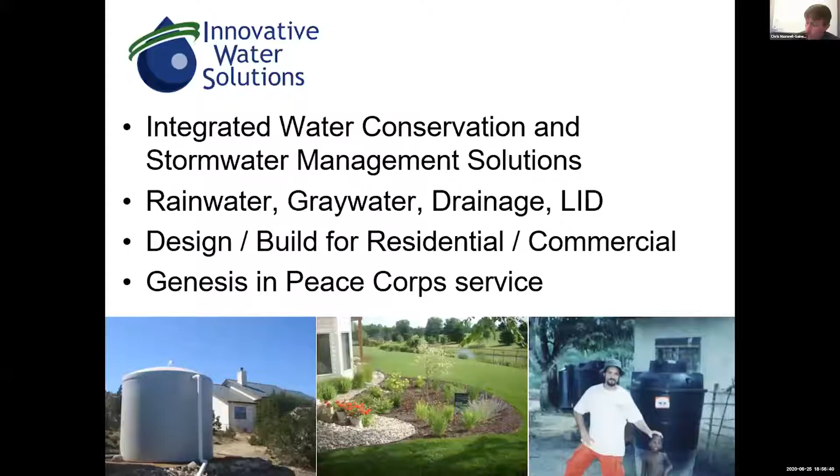So that's kind of the genesis of the company and where we are nowadays. I just realized I hadn't updated this slide in a while, so let me show some of the statistics.

We're over 8 million gallons of rainwater storage volume installed since 2004. We're over 1,000 customers, and we're almost at 600 rainwater systems. These systems vary from 500-gallon tanks all the way up to our largest, a 330,000 gallon system. So there's a wide range there, and a lot of experience and things we've seen over the years.

Before I get going, because I've been doing this for so long and seen so many DIYers and so many different types of systems out there, I came to put together this psychology of rainwater harvesting.

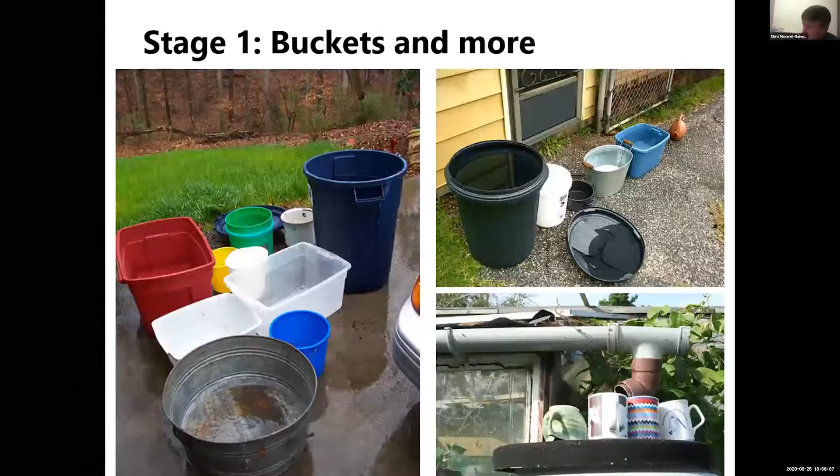I think it's just a journey a lot of us go through, and I'd like to share it with everyone. Stage one, you start off with buckets and pails, even coffee cups. That's what you start off with—you just want to collect it, dip it out, use it for your plants, and that's good. That's where a lot of people start.

Then maybe they take it up a step and actually purchase a rain barrel, commercially available or manufactured, or even just augment a trash can to be a rain barrel. It looks a little better than a bucket, but yeah, they take it to the next step.

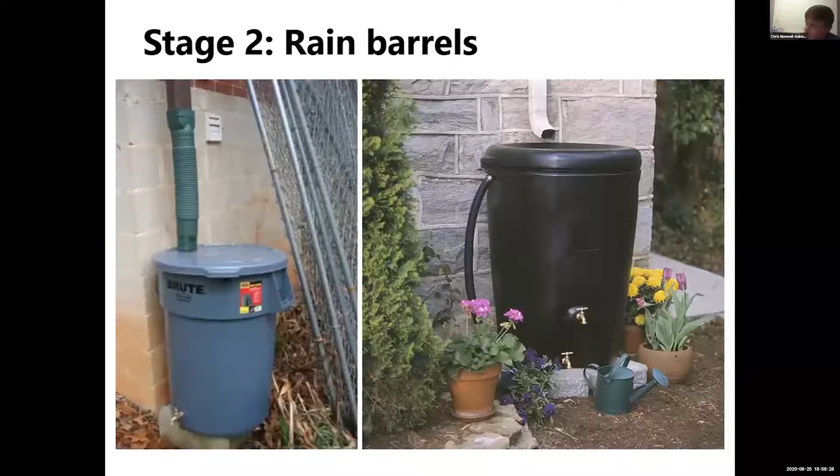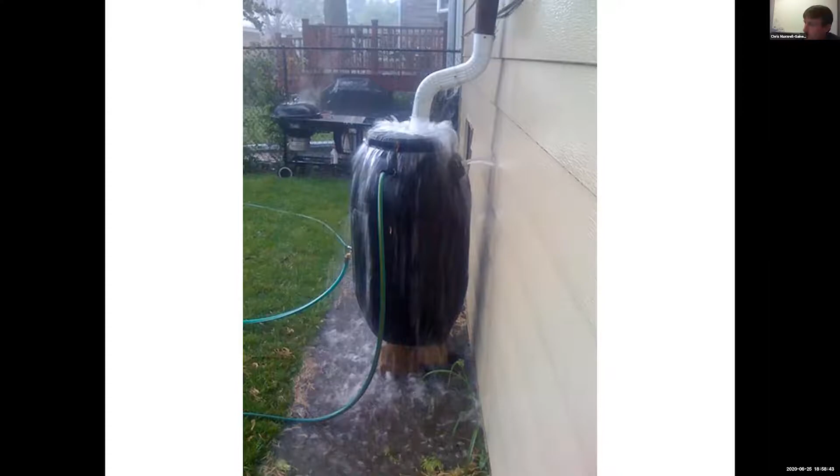But then this is what typically happens with rain barrels—they fill up very fast. They do provide a good amount of water, but not enough for maybe your needs. So people step up to the next step and think, well, if it's overflowing, let me just add some more barrels to it.

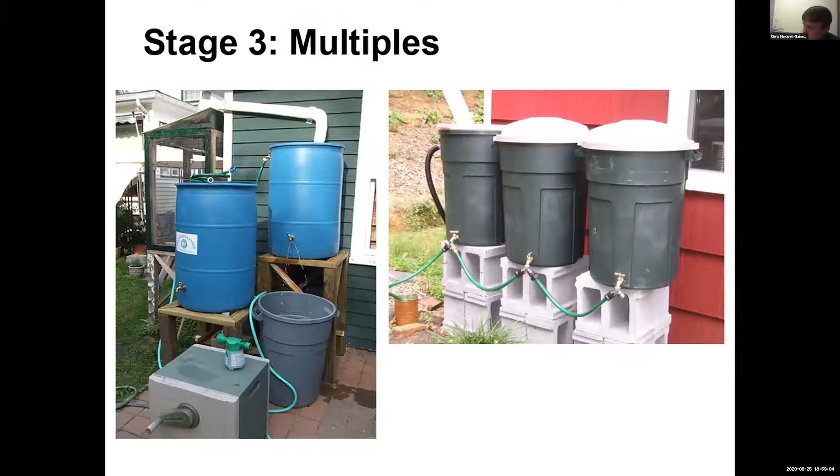You can even see someone solving a leaky hose bib issue by putting another barrel underneath it. They think, hey, let's start putting these barrels together, even creative setups like this. But when you count up the number of barrels and multiply by their volume, in the end it's overall not a lot of volume spread across a large footprint.

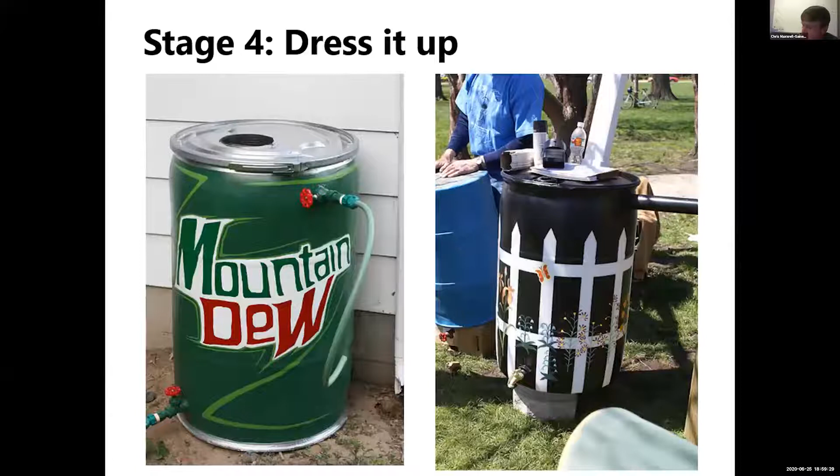So then you think, well, let's make it look good. Rather than just plain old barrels, let's add some paint, some designs. Let's put them in a cabinet. Let's paint a Texas flag on it. Just do something to spruce it up a little bit, and that's good.

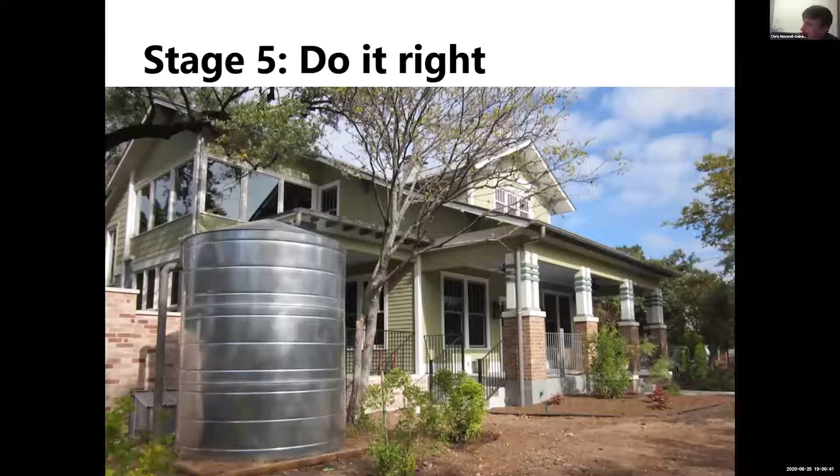It looks good, but to really be effective—I don't want to say rain barrels aren't doing it right—but if you seriously want to take rainwater harvesting to the next level, it's going to take exploring larger volumes and harvesting them into a singular unit, so it becomes easier to use with, say, a pump system.

There's no more news stories out there on the local news about the level of the lakes and all that. But then next thing you know, as always, drought starts to come along. Our rivers and lakes start declining, and then we realize, hey, there's something going on, even though we should have been cognizant of that the whole time. Then we have a growing concern, and hopefully it doesn't get to panic, but it often does, such as in the 2011 drought here in Central Texas. Then something like the Memorial Day 2015 rain comes along, 20 inches, and fills up Lake Travis and the Highland Lakes immediately in one day, and the cycle just starts over.

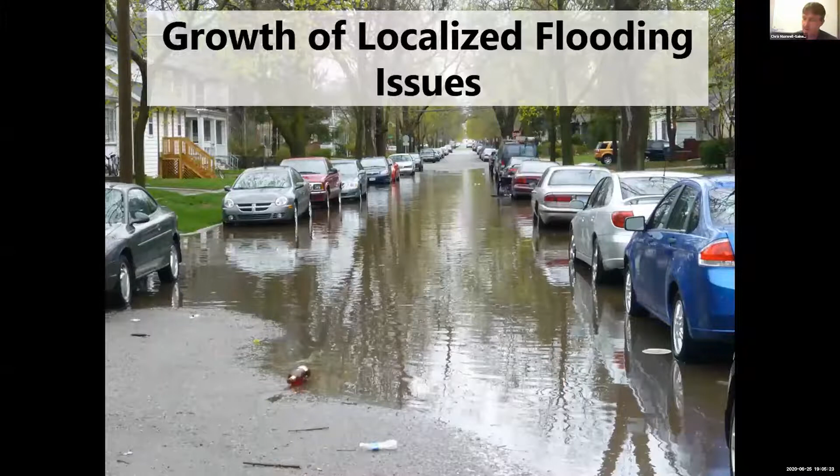I could not even know it's raining outside, and we can just track it by the number of phone calls we get to our business based on the size of the storm event. Because when these large storms roll through the area, it exposes a lot of problems for people, and naturally our calls go off the charts. We're seeing this more and more, and part of this is because of the amount of impervious cover that's being added to our urban areas.

And then you get things like scour, with so much water flowing off the impervious cover into our waterways that weren't meant to convey that amount of water, or that speed, or that intensity. So you're getting stream bank erosion happening, and a lot of cities, like the city of Austin, are having to spend capital funds to implement projects to shore up these different stream banks.

And then obviously there's an increase of stormwater pollution, which is just bad overall for our watersheds, for the fish and animals that depend on the water flowing into these creeks. So there's ways to mitigate this. Again, rainwater harvesting is not going to be the end-all savior of all this, but these are just some really key reasons that we need to start putting our eye towards managing stormwater, possibly through collecting it.

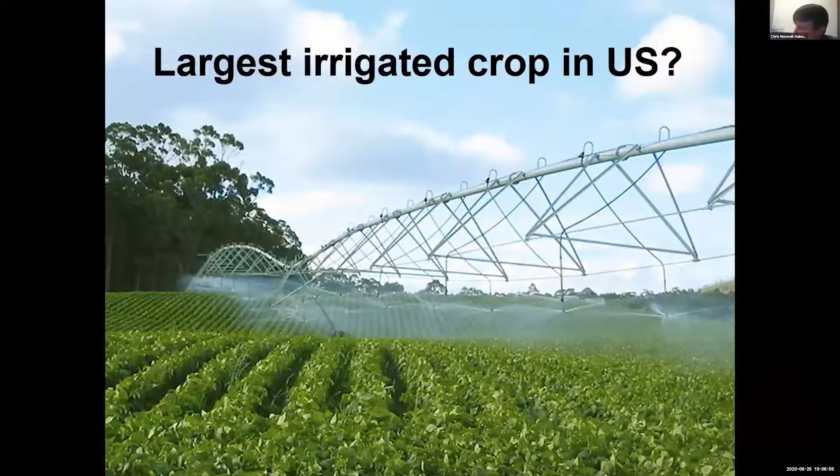Moving on to the next big reason for rainwater harvesting. I won't do a poll, but does anyone know what the largest irrigated crop in the US is? Maybe some of you have heard this before. I wouldn't be showing a picture of crops if it were crops. Actually in America, it's turf grass that's the largest irrigated area. Hey Jessica, yeah you got it, lawns. So there you go.

So when we start thinking about it, why are we using municipally treated potable water to spray on our lawns when we have a perfectly great opportunity to use rainwater?

An example from the City of Austin: this graph shows two years. The green is 2007, kind of spiky near the bottom, and the pink is 2011, a dry year. You can see the differential in City of Austin water use. The scale on the left is million gallons per day, and there's a vast difference between the wet and dry year. The wet year averaged about 150 million gallons a day in summer, versus 210 million gallons a day in the dry year. I grant you that wasn't everyone taking more showers during a dry year.

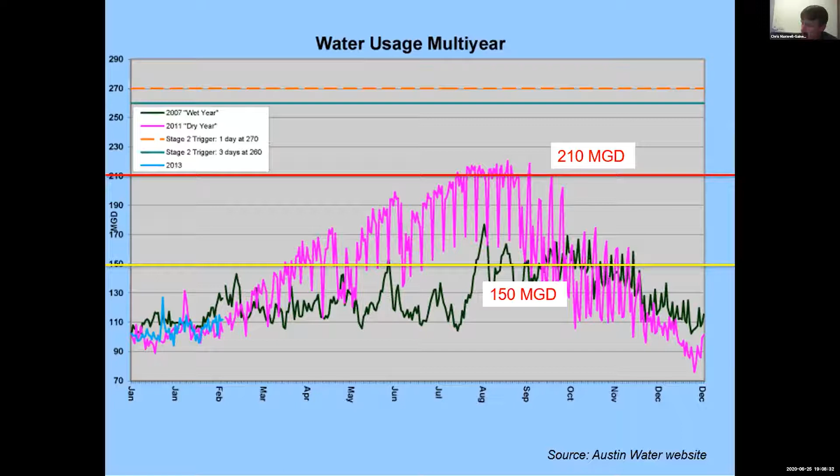So basically 60 million gallons a day during the summertime between these two years for the City of Austin was used just to put out on our plants and landscaping. Something to consider when you put it in that scale - 60 million gallons of water used for irrigation a day is pretty baffling, just the enormity of it.

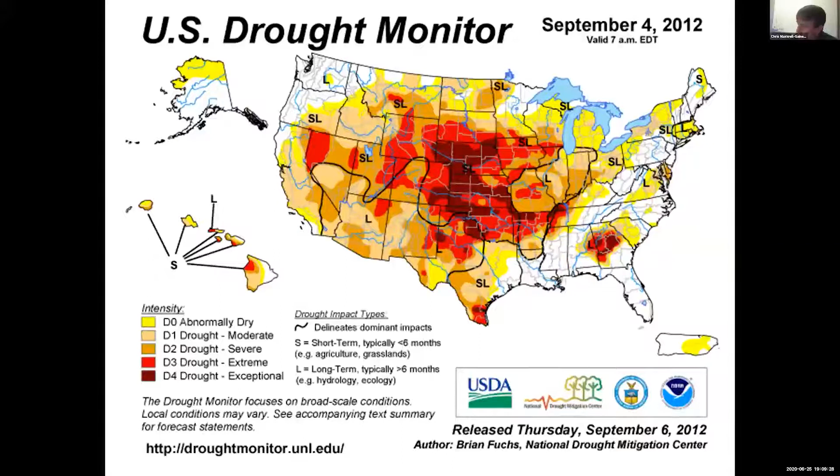From here we kind of bumped along for the next year - these are all roughly a year apart, so you can see the time change. The drought moved up into the Midwest, still lingering around 2014, and then we're slowly getting better, definitely in the Texas US. But to return back to the level of 2010 took about six years to get through that. So I use this as a way to say we have to be prepared for what's coming in the future.

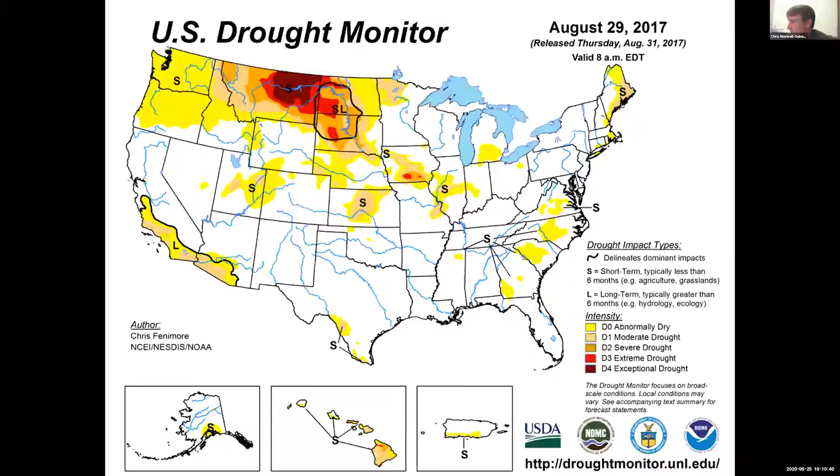There's going to be a lot of climate change issues, so having the ability to harvest rainwater matters - because even during that dry year of 2011, it still rained about 15 inches here in Central Texas annually that year. So we still got rain, it wasn't like nothing at all. There were still opportunities to collect rainwater even during the driest of drought years. Being able to buffer your risk and get you to the next point is a great opportunity for rainwater harvesting.

Another big thing with water is embodied energy - sometimes you hear it called the water-energy nexus or energy-water nexus. It basically means it takes energy to produce water for consumption, and conversely, it takes water to produce energy. Think of cooling - thermoelectric plants need water for cooling, using it for steam generation, all that stuff.

So there's a lot of embodied energy in the water that we have to use as a society. I put this graphic together to show where this embodied energy comes into play.

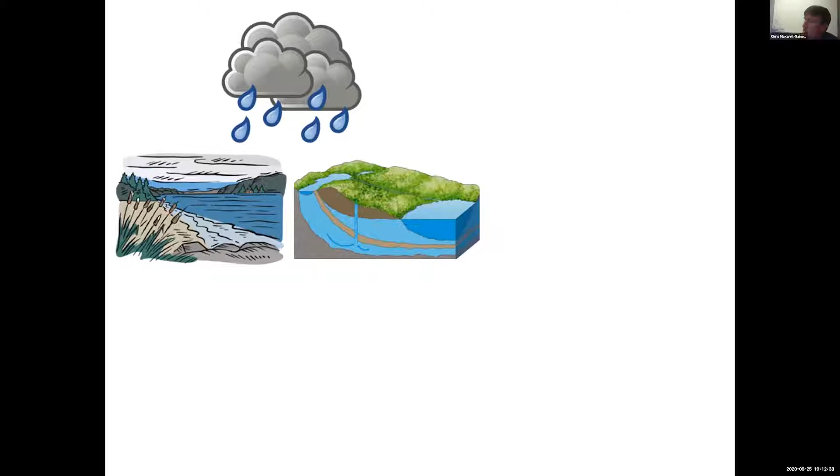Then we come in and we're pulling the water out of our lakes, pumping it out of our aquifers so we can treat it. Then we treat it and put it into our system so we can push it out into the distribution system. Our cities have miles and miles of water pipes that all that water is going through in order to get to our homes.

Once it's there in our homes, what do we use it for? Of course we use it for indoor use, but we're also using it for irrigation and outdoor use. So basically we're starting with the rain coming down, harvesting that water, and then putting a lot of energy into cleaning it and pumping it miles and miles around our cities.

On the flip side, our wastewater is essentially the same thing. We're doing the same process: collecting it, pumping it miles and miles, treating it, and then putting it back into the environment.

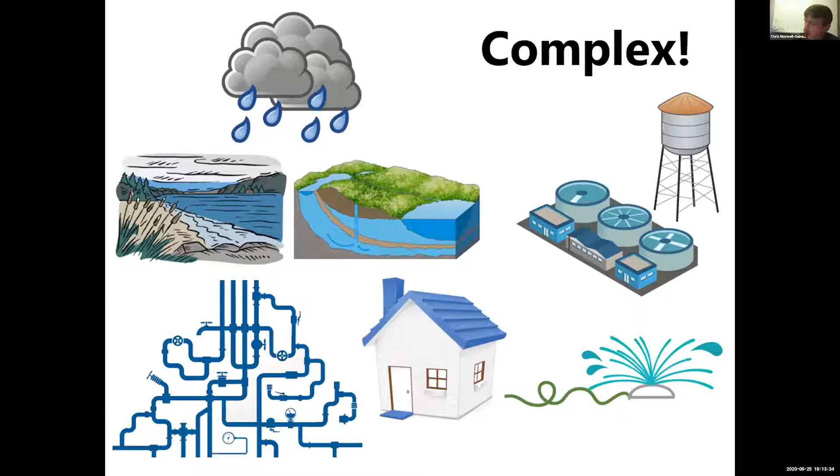So obviously, hopefully where I'm leading with this is rainwater harvesting. It's a much simpler idea, and it can strip out a lot of that embodied energy. We start with the rain, and if we know the end result is irrigation use, rainwater collection cuts out a lot of steps, and therefore a lot of the carbon footprint associated with most of the water resources we use in our society.

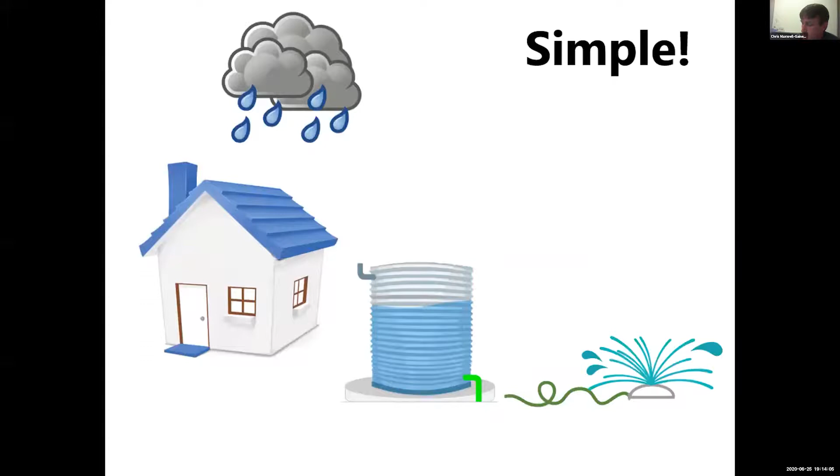So I hope that setup enticed y'all to understand why rainwater harvesting is really important. Richard just pointed out that some cities do have toilet to tap, but there's really only a couple. I believe Wichita Falls in Texas is one of the closest, where they're taking treated wastewater, putting it into the reservoir, and then pulling the water out to be treated for potable use.

I think El Paso has a direct injection well, so they're taking treated wastewater, injecting it into the aquifer, and then miles away pulling that water out. So there are some cities trying to buffer the risk of droughts, because the 2011-2012 time period really taught a lot of our cities that they need to be thinking about the future.

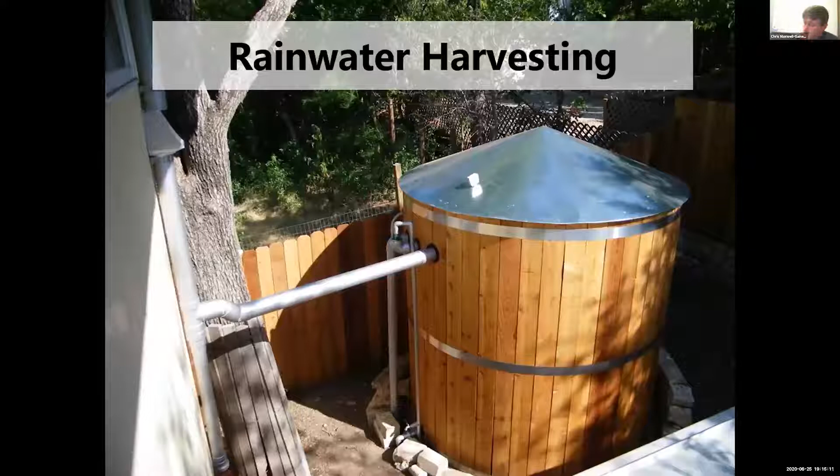Is it worthwhile to collect rainwater in El Paso when it only rains 14 inches on average there a year, and most of that comes in maybe 2 or 3 rain events with the monsoon? Or is it beneficial to collect it in Houston when they get 50 inches a year and they're just worried about getting the water away? It's really awesome to see the different climates here in Texas and trying to apply rainwater harvesting to those different climates.

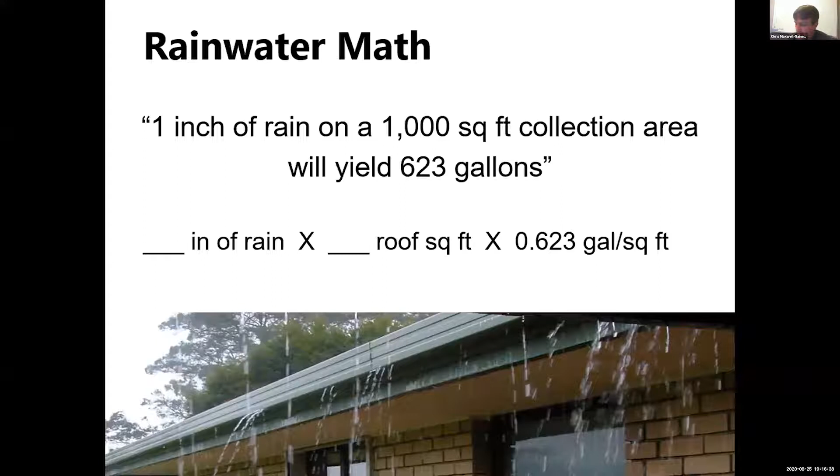So just very basic math: rainwater harvesting, 1 inch of rain over 1,000 square feet gives you 623 gallons. It's a lot of water, and at the same time it's not a lot of water. But it's just a free resource that can easily be tapped when anyone has a structure, a roof, to collect it from. Again, a lot of y'all understand the benefits of rainwater harvesting, and as I've mentioned before, the opportunity to reduce stormwater runoff.

A lot of times when we come into a situation where people are having drainage issues, a big culprit is the runoff from the roof surface. So when we decided to add drainage into our mix of services, we were really trying to figure out the nexus of: if someone needs a drainage solution, can we pitch the idea of a rainwater harvesting system? They can solve their drainage issue by collecting the water off the roof rather than letting it pool around the house. Can we collect it into a tank, and then direct the overflow to a better spot so it doesn't cause flooding issues?

Over the years we've done a lot of projects like that, where someone started off just thinking about fixing drainage, and then that morphed into, hey, let's actually collect the water and allow that customer to use it for lawn and landscaping purposes.

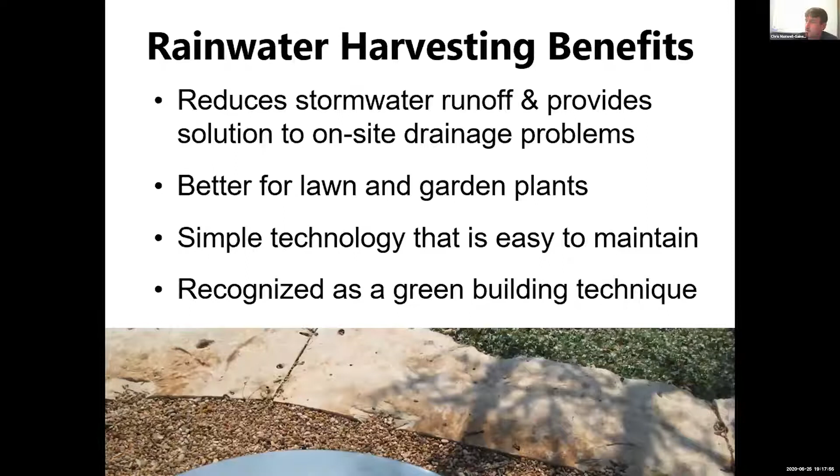So the three main uses: the first one is outdoor water use. Very simple, not much needed—a simple rain barrel is good to go with that. You can expand on it, and with typical outdoor use, keeping big organic matter out of the storage container is beneficial. But if something gets in there, it basically becomes like a compost tea, which is also beneficial to your plants. So it's not bad if some organic matter gets into your rainwater tank if you're using it just for outdoor use.

The next step is indoor non-potable. Since it's a state law now, all cities allow you to bring rainwater back indoors, even if you have a municipal water tap on your site. Prior to 2015, you could not use rainwater indoors, but a law was passed that allows that. Rather than taking it all the way to potable use, you can bring it in for indoor non-potable, such as toilet flushing and clothes washing. We've only done a few of those projects because it fits well for a new build rather than a retrofit, so opportunities may be a little few and far between.

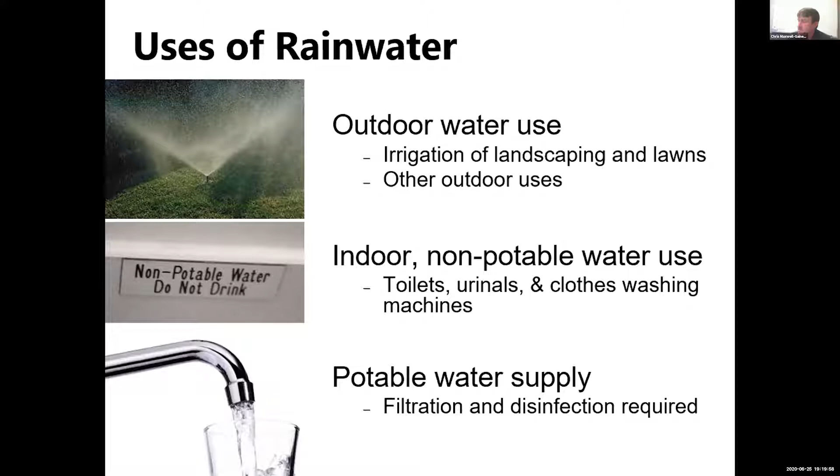One of the biggest questions I get all the time is, how big of a tank should I install? That's hard to answer without more information. But to figure out the best size of your collection system, you want to take into account your collection surface size. If you're only collecting from one downspout pulling 200 square feet, there's no reason to put a 3,000 gallon tank on that, right? So you want to consider that.

You want to consider the storage volume size, because these things can really start to have a big footprint and eat up a lot of real estate. So look at the area where you're going to locate your tank, and whether you can put as large a tank as you want in that space. Last is your expected demand—are you going to feed it into an irrigation system like spray irrigation and use a lot of water? Are you just going to use a single hose bib, or water pails to water your plants? What's your demand out of that? Those three things come together.

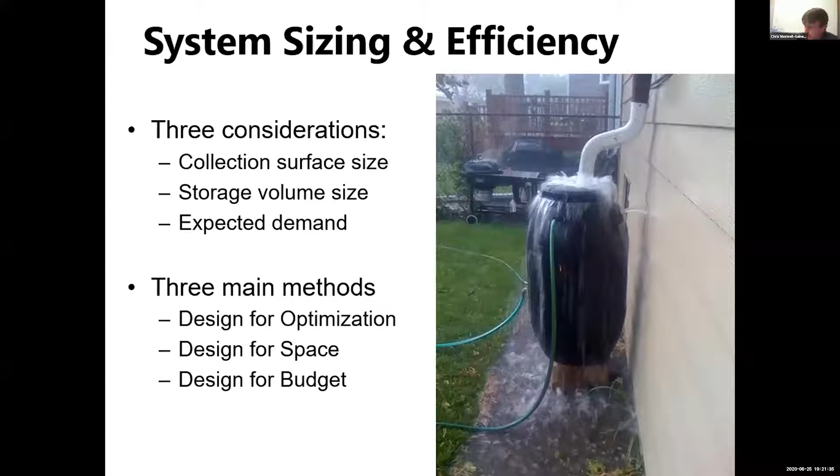From that, I've created three different methods: design for optimization, design for space, and design for budget. Design for optimization works well if you have good numbers about how much water you need. Typically on a commercial project, a landscape architect designing the landscape will put out a demand calendar or schedule to know how much water the landscaping may need over the year, taking into account the ET rate, monthly ET rate, and all that stuff.

So in lieu of having the exact demand for your plants, just going about and having a general idea, and even using your own water bills or something like that, you can use that data to at least give you a good starting point.

And then in places where we have that feast and famine of rain events, very long, heavy rain events, and then droughts, it's really important to try to put as much investment in your storage volume as you possibly can.

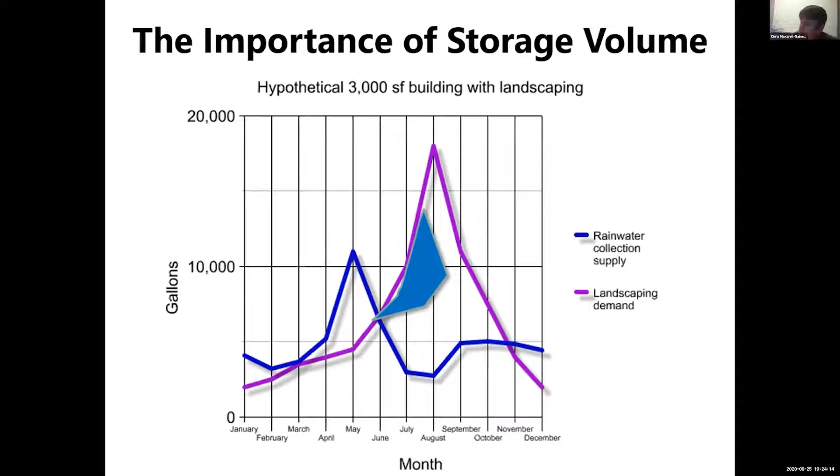So you can see you're collecting a lot of water during that springtime over what you really need. And so what we're trying to do with storage volume is capture that water, and figure out a way to move that volume over into the time when you need it. We want to try to size the storage volume as large as we can without going overboard, keeping in mind the optimization idea.

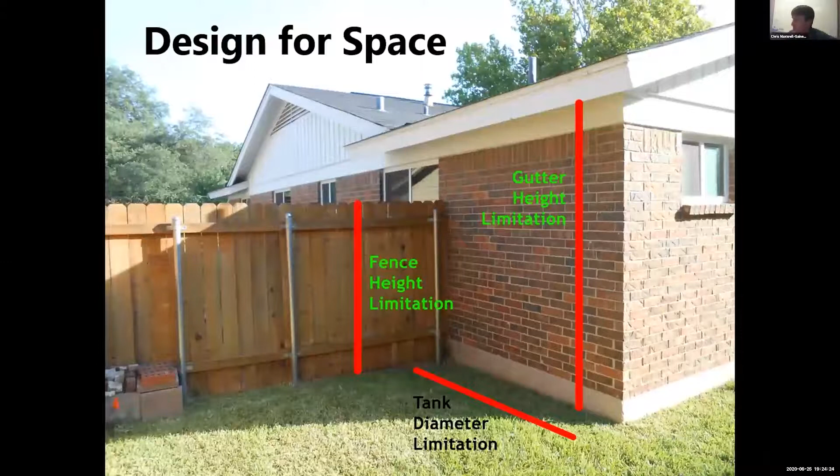Or like in this example, what if you wanted the tank to sit here and you did not want to see it from around the corner? Well, then you have a tank diameter limitation, and so we're going to size the tank accordingly. And then obviously we always have a gutter height limitation, because you can't have a tank taller than your gutter, unless you want to pump the rainwater into the tank. In lieu of doing that, as long as the gutter is taller, then the rainwater tank water will flow by gravity into that tank.

So using these limitations, we can design a rainwater system for that space.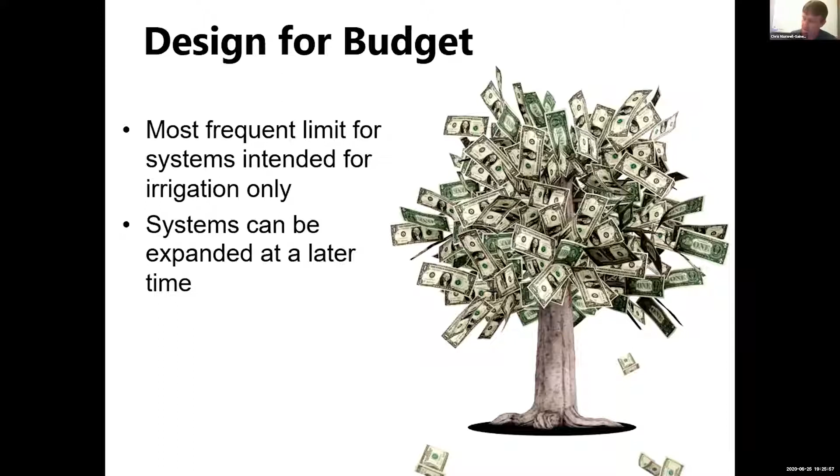Now, last but not least, is design for budget. We have a lot of people who come to us very excited about wanting to implement a rainwater system, and they think it's going to be so awesome, and they just want to do so much with it. We're very happy to help them along, but we also have to realize that most people have budgets. So we really try to optimize the system design and system operation to maximize the budget as much as possible. Something always to keep in mind when you're looking at these systems.

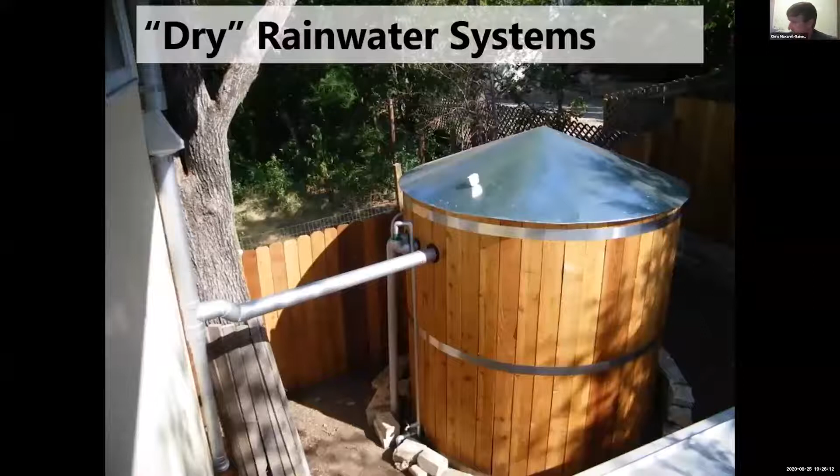So there's two types of rainwater systems. The first one we'll talk about is a dry rainwater system. You can see the example there. Essentially what's happening with a dry system is the water comes into the collection pipe, and then the collection pipe goes into the top of the tank. Imagine a rain barrel, so downspout into a rain barrel. Well, after a rain event, this pipe will dry out, and so hence the dry rainwater system.

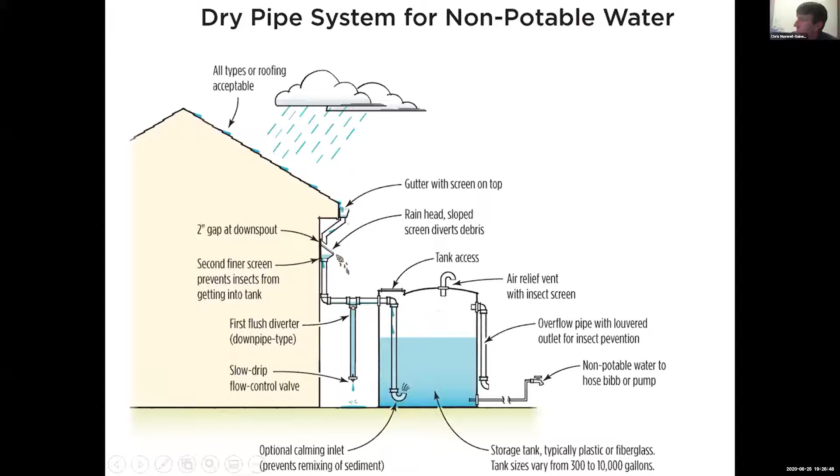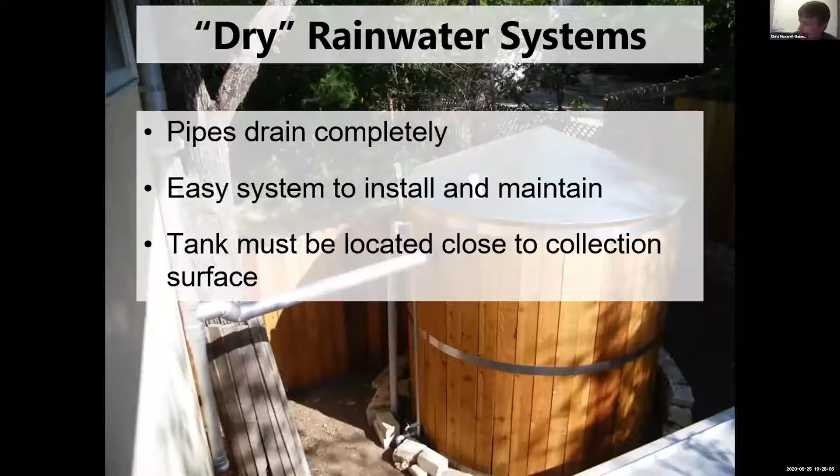Like I said, the pipes will drain completely after the rain event. Typically these types of systems are smaller, easier to install and maintain, but the one big thing is the tank must be located close to the collection surface. Unless you want a flying pipe going from your downspout over to the tank, but typically a dry system involves a tank being pretty much up against your house.

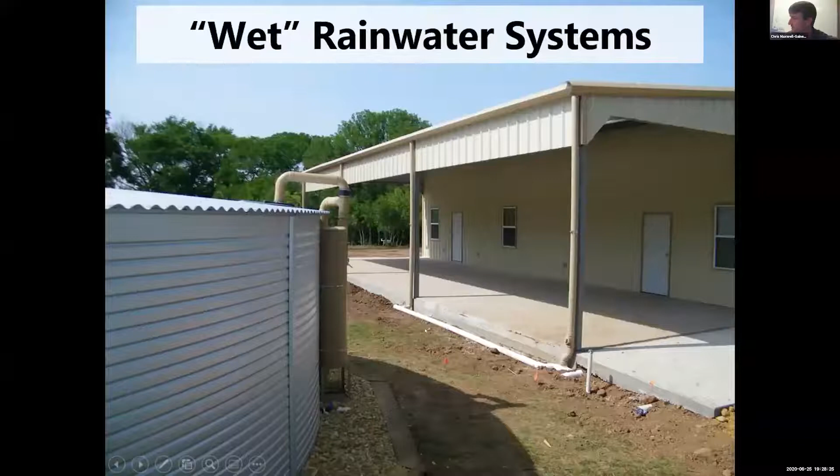So this is essentially a wet system, because after the rain is ended, this pipe stays wet - or it can, if you don't have a clean out or a drain mechanism on it, which we always recommend. But theoretically, this pipe would stay wet after a rain event.

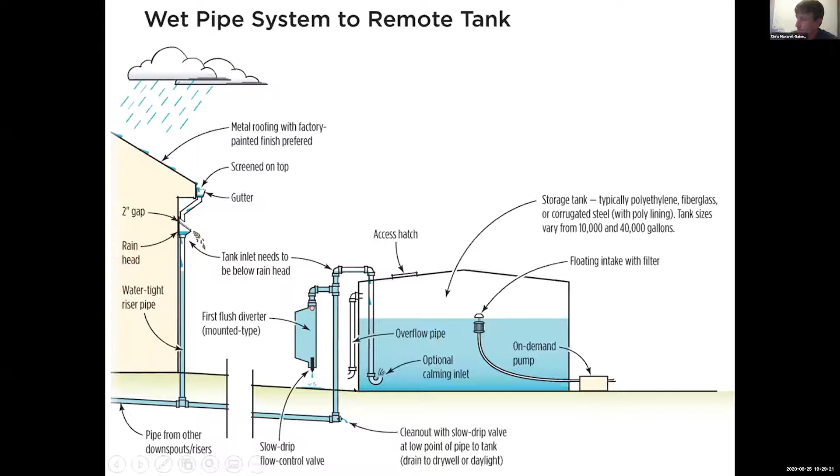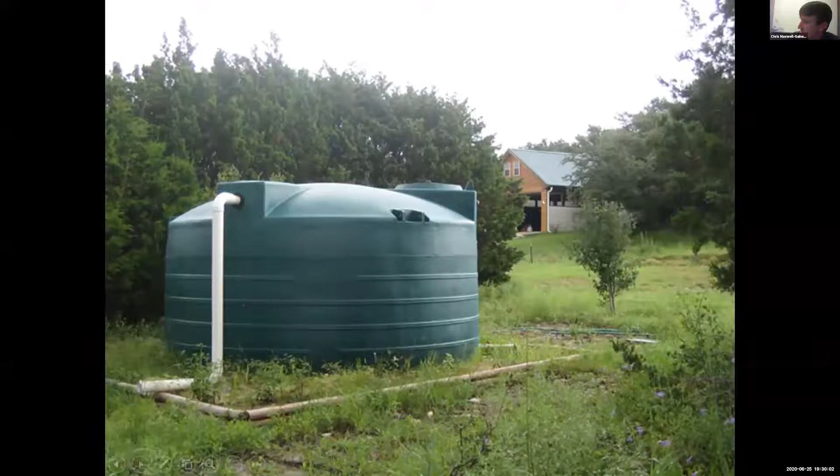Here's a residential example, and you can see one of the downspouts coming down, and by shooting an elevation over, we're really far down from it - probably a good 6-7 feet below that point. So water's going to come down here and then up and into it. So there's your wet system, and the water remains in the pipes - that's the main definition of a wet rainwater system.

Your gutter, the bottom of your gutter must be above your tank inlet. You will also want to account for some friction loss as the water is going through the pipe, so you don't want to be perfect with that - you want to give yourself some buffer.

But the biggest benefit is now you can put your storage tank wherever you want to put it. So if you have a corner of your property that's just a dead corner, we can locate a rainwater tank there, and we can make that a usable corner, and bring all the water from your roof to that point. This leads to a greater collection efficiency - you're collecting from a larger portion of your roof, and possibly you even have a larger tank to collect it into. So just a much more efficient system.

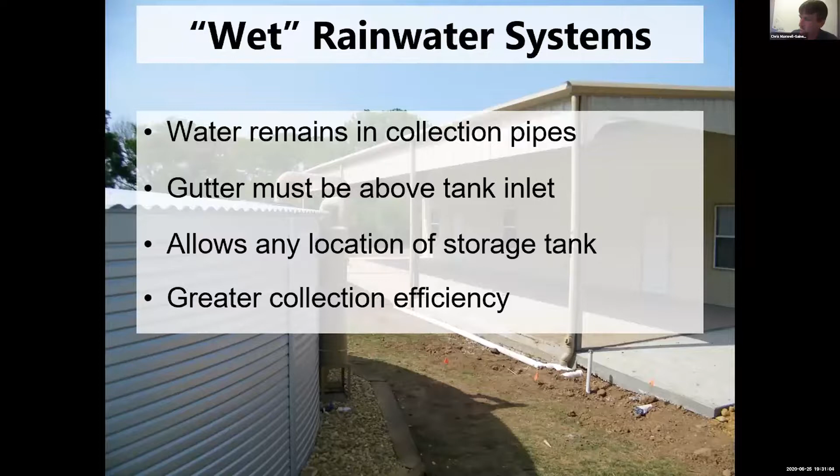Essentially what's happening here is it's a P-trap. If you imagine this is the gutter, and here's the downspout, and here's the underground pipe, and here's the riser pipe that goes next to the tank, and then it spills over. And if you imagine here's your tank, this underground pipe and the riser pipes from the downspouts into the tank stay surcharged with water.

So there's no pumps, there's nothing - this is all done by gravity. And again, it's just water trying to seek its lowest level. And that's it - so it's just a big P-trap you're creating.

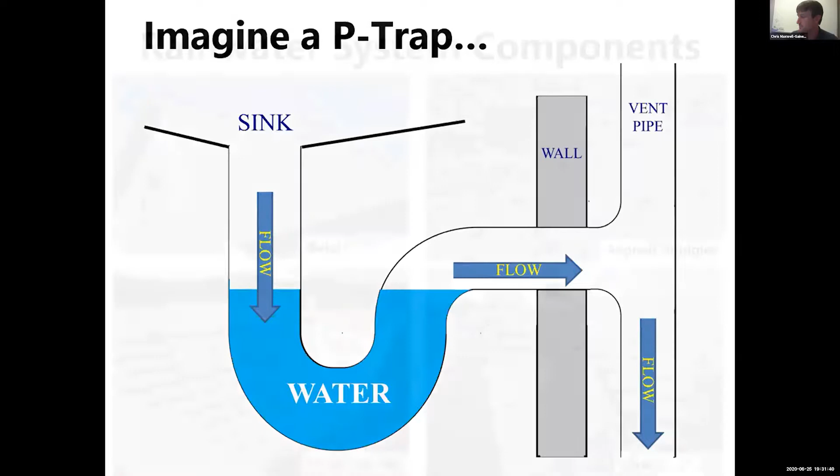So I'm going to step through a few of the different rainwater system components.

Another big question we get all the time is, can I collect rainwater from an asphalt shingle roof? The short answer is yes, you definitely can. The long answer is, obviously there would possibly be some asphaltic, polyaromatic hydrocarbons coming off of shingle roofs. But in the end, if you have surviving plants around your house, and the water has been coming off your asphalt shingles for years, falling into your planter beds, and all your plants are good, then typically you're going to be fine collecting rainwater from an asphalt shingle. So that's kind of a funny answer, but yeah, it's perfectly fine.

Now when you step into wanting to collect rainwater for potable use, you really want to start looking at other types of roofs, such as metal, clay, concrete, or slate, because of the potential for toxins that could be in some of that roof material.

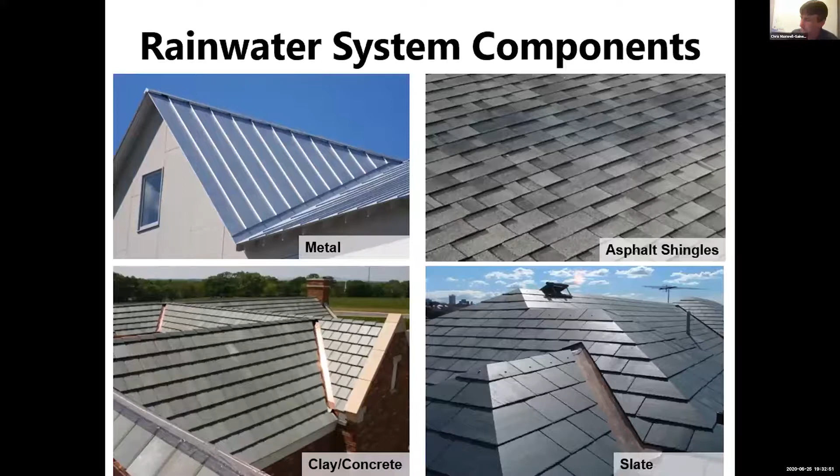Next, you have your gutters and then your gutter screening, and this really is your first line of defense. Especially for irrigation systems, you're wanting to keep the big stuff out. So the leaves, the twigs, the acorns, those typically are the things that once they get into a gutter, they cause gutter issues, overflows, and all that stuff.

So you're really wanting to try to do something either at the gutter screening level, or even, as you see here, a little rain head, as we call it. It has a slanted screen on it, as well as a flat screen inside. Basically it helps to slough off any leaves that may get into the gutter and into here, again just keeping that really large debris out.

The smaller debris, the pollen, that type of stuff is going to get through. You really don't want a screen at your gutter level to screen that out, because you would be cleaning it after every single rain event, since it would just get clogged up so bad. So for irrigation use, that type of stuff getting through is definitely okay.

And so inlet filtration is vital. I show this as an example because this was a project where the homeowner took the advice of the gutter installer to use this type of screening, even though they had cedar elms dumping onto their roof. After the first season of cedar elm droppings and everything, they had water coming out of the gutters, not collecting into their rainwater tank. They called us saying there's something wrong, and we said, yep, there's definitely something wrong. The screening is not matched up with the type of debris that's coming down, because obviously the cedar elm debris can get through this type of screening. So we did have to change it to a different type of screening. But basically, if water can't flow through your gutters, it can't get to your rainwater tank, and so then you're not collecting rainwater. So inlet filtration is definitely vital and a key part of a rainwater system.

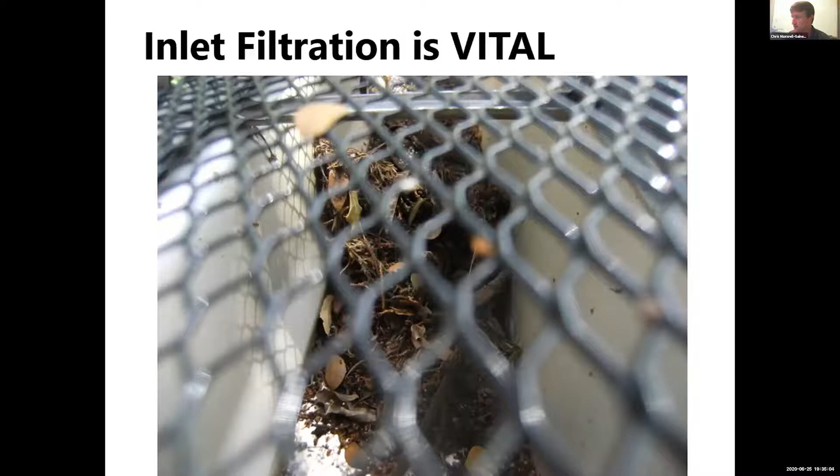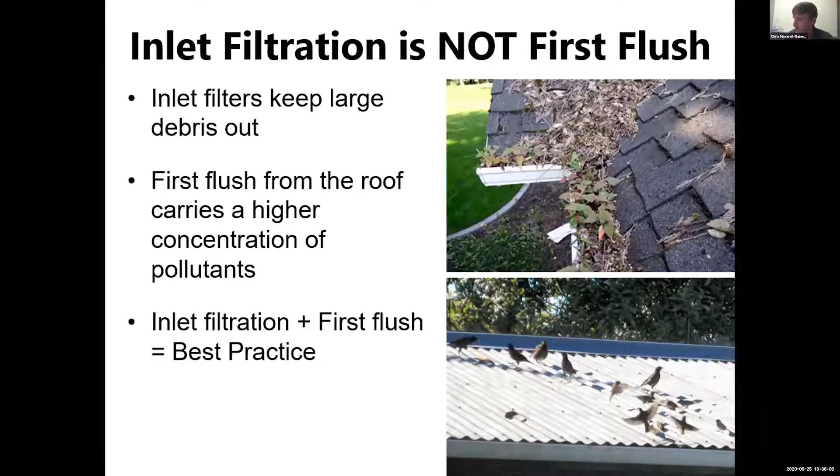A lot of times when you're reading stuff on the internet, there's confusion between inlet filtration, or just filtration, and first flush, and they are not the same. They're two totally separate, different ideas. Inlet filtration is keeping the large debris out, and first flush is flushing that first bit of water that comes off your roof, so that the smaller particles that wash off your roof during that first wash get wasted away and aren't collected into your rainwater tank. As you can see on the bottom here, the smaller particles, bird poop, pollen, dust, all that type of stuff, that's going to get through your inlet filtration, but then you employ your first flush to flush that first wash away. So by implementing inlet filtration and first flush together, that's your best practice there.

So how to accomplish first flush. You can see here what's happening. Water's coming down from the gutter, getting into the pipe, and it first has to fall down into the first flush diverter here. This is just a constant volume diverter, about 60 gallons, give or take.

What's happening here is water's coming into the volume, and with this particular kit, there's a float ball that will float up. Right here there's a little constriction point, and that ball will float up and seal that up right there.

Once it seals, the water will continue to rise and then flow over into the rainwater tank. So you've flushed your first 60 gallons of water off of that. Then at the bottom here it starts to meter itself out, there's a little dripping mechanism down there. So that's a real easy, common way for first flush.

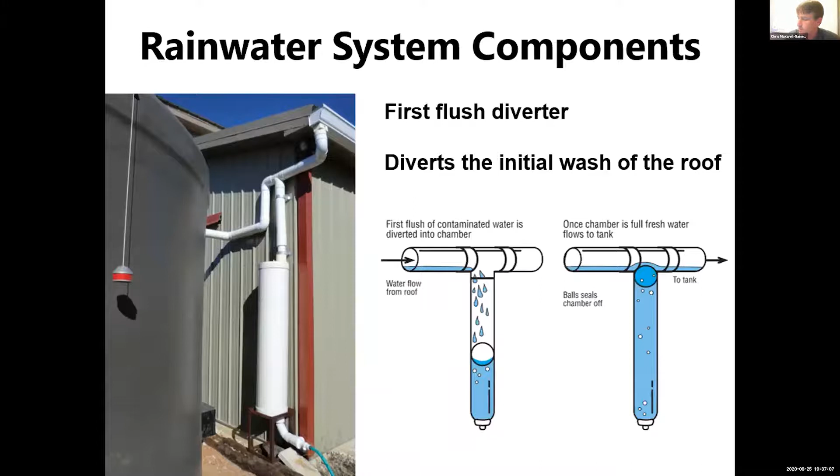So how much first flush? That's a good question, and it really depends on the research you read. It's all over the board, stuff from Germany and South Africa and all these different places. It's crazy, all the different equations these professors and academics come up with.

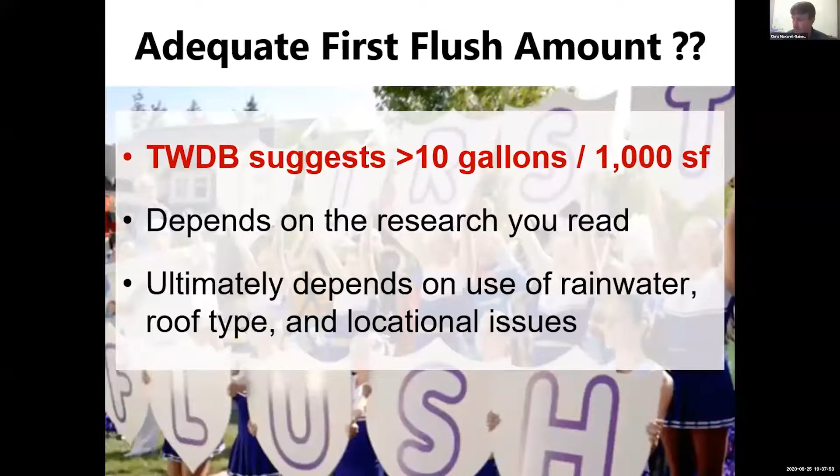But it ultimately depends on how you're using the water, what type of roof, and if there's any locational issues, like if you're near a plant spewing out some sort of air pollution. The Texas Water Development Board suggests at least 10 gallons of first flush per 1,000 square feet of collection area, and we kind of run with that number.

After first flush, there's an opportunity to potentially filter the rainwater again through a secondary filter, like this tank inlet filter. The key thing is make sure it's accessible. Don't plumb it in so everything's glued and you can't get to that screen. Make it accessible, like we have here with a rubber coupling, so this whole U can be removed and you can get to that secondary screen.

A lot of times these secondary screens are really on the larger tanks, and not so much on the smaller poly tanks or galvanized metal tanks.

Then after the water is collected, you want to use it. One easy way is with a pump system, so you can use it in a water hose or a manual sprinkler to distribute that water out to your plants. You can size the pump for different demands, whatever you need it for.

There's obviously different types. Are you going just to one single hose bib, so you put your water hose on it? Do you want to connect it to your irrigation system? Do you want to have it on demand? So there's different types of pump systems out there.

And I always say you don't have to settle for your on-site water pressure. Meaning, you have your city water coming in, but for whatever reason you want to dial it up a bit on your rainwater system, you certainly can do that.

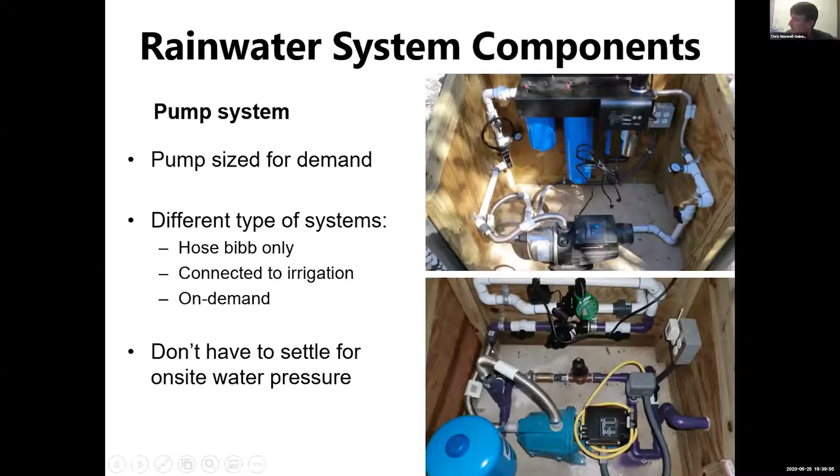But what you're seeing up here is a bit of an autofill system, and we'll talk about that here in a slide or so.

Water level gauges: there's a couple different ones on the market, from very simple, inexpensive ones that just gauge when it's full to when it's empty, to this plumb bob style that actually goes up and down with the water level. There's electronic ones if you really want to get fancy, with readouts you can put inside your house.

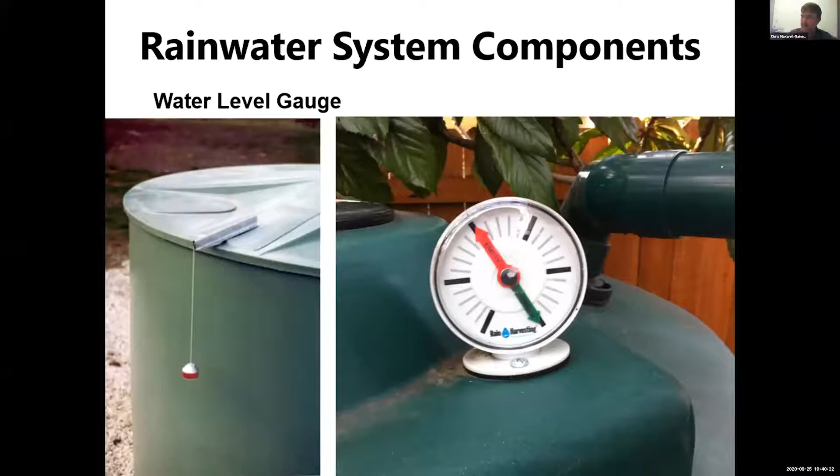Your backup water supply really comes into play if you're connecting your rainwater system to an irrigation system, because that irrigation system's going to go off once a week. I think that's most cities around here, maybe other cities out of drought stage go twice or three times a week, coming on early morning. You don't want to worry about whether you have enough rainwater in your tank, or if it's going to go dry, because you don't want to run your pump dry.

So if you are going to connect it to an irrigation system, you can employ an autofill system. You can see what's happening here: the municipal water is coming up here, and then it goes into this air gap, essentially, is what you're seeing here.

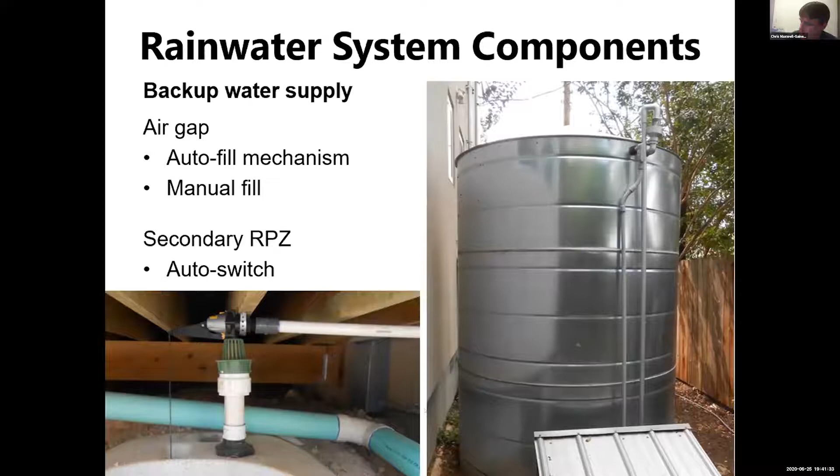And then it flows into the tank. And basically we set it so that the fill float will only fill about a foot of water, if you want to call it that. So it just keeps a minimum amount of city water in that tank at all times so that your pump never runs dry.

Anyways, always want to consider a backup if you are having an automated irrigation system connection. Then you have your RPZ. So if you are installing a pump, this is a pressurized auxiliary water system, and the city wants to protect their water supply from any potential issues that could happen if you make the wrong connection on your side. If you are pumping the water, theoretically you could install a pump that's pushing higher pressure than the city pressure, and therefore you could push untreated rainwater back into the city. So a special backflow prevention device is installed if you do have a pump system. If you just have a large tank with a hose bib on it, there's no need for an RPZ backflow device, but only if you're running a pump. I definitely wanted to point that out.

So transitioning now, I went over the basics of how to design a rainwater system and the different components. Now I want to get into some of the do's and don'ts. These are things that I've collected either myself being out there taking pictures when I visit people's homes, or online. I do want to make a disclaimer: if any of these pictures are something you've done, or that's your system or your house, forgive me, I don't mean to poke fun. Inherently there's nothing wrong, you can't really mess up rainwater harvesting. But I just want to show differences between some of the ways that could cause problems, and ways you can remedy that with different installation styles.

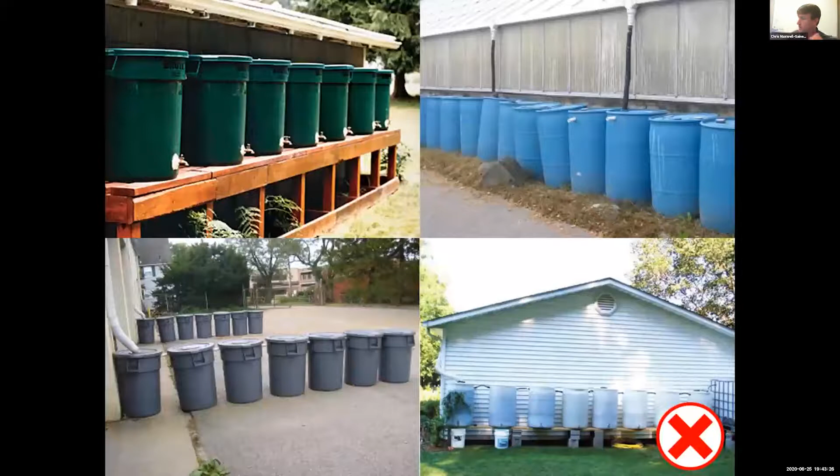So going back to the idea of rain barrels and daisy chaining rain barrels, again nothing inherently wrong with this, but when you add up all of that volume across all these pictures, you could easily get a single 500-gallon tank, or maybe a single 1,000-gallon tank, and have it in one spot rather than having this strung out. Now, some of this is people reusing, right, going to the local Dr. Pepper bottler and getting these barrels for free, and that's great, I don't want to dissuade people from doing that because you're reusing a product. That's absolutely great. But just know that when you're trying to daisy chain all these things together, all those connection points at the bottom particularly are a liability where something could go wrong and you could lose all the water.

I got a question from Joel: are people using these systems to collect condensate from AC systems? Absolutely, yeah, definitely.

It is a great opportunity. The only issue is that typically a residential air handling unit, while it seems like it puts out a lot of AC condensate, in the end it really doesn't. So sometimes the mechanism of trying to collect the AC condensate can involve pumps and whatnot to move it. If you have a perfect situation where it's dropping down from your attic or something, then that's great, absolutely use it. So you can definitely tap onto AC condensate if you can, but in my experience it is a relatively low amount of water, particularly as our AC systems have gotten more efficient over the years, with new construction and all that stuff.

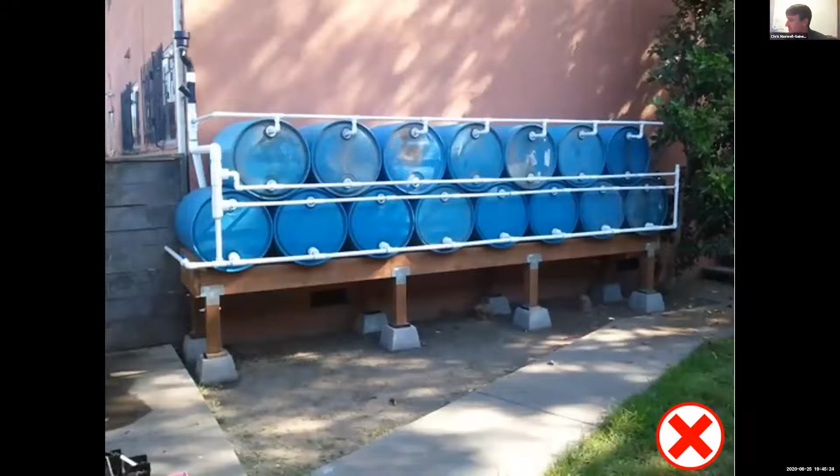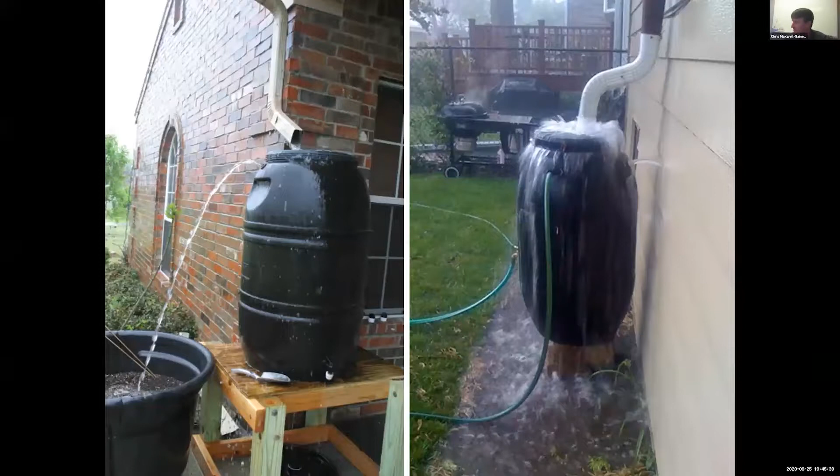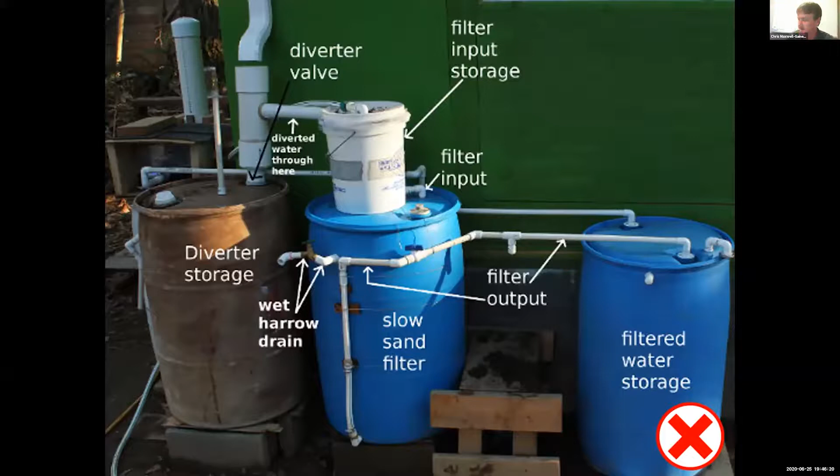Something like this, I came across in a house inspection I did for a potable rainwater system, and I can't tell you what is happening with this. You as the person who puts it in, or the homeowner, may understand it, but what if you sell your house? That's exactly what was happening here - they were selling this house and wanting an inspection to see how this rainwater system and the well water system jive and come together. So there's better ways of doing this.

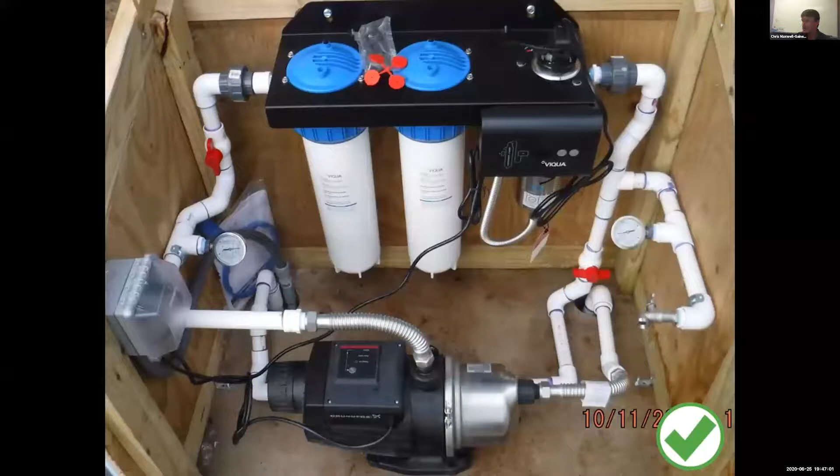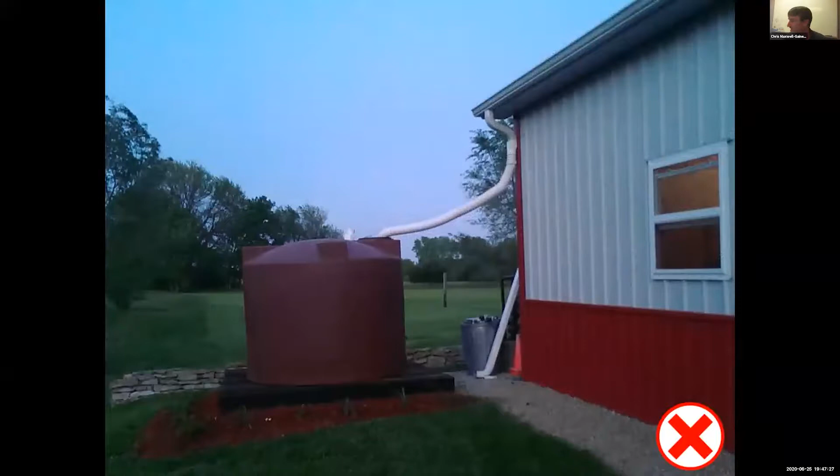Using the corrugated stuff, again, a good storm comes through, could just pop that thing right out of there. So again, making your connections as good as you can.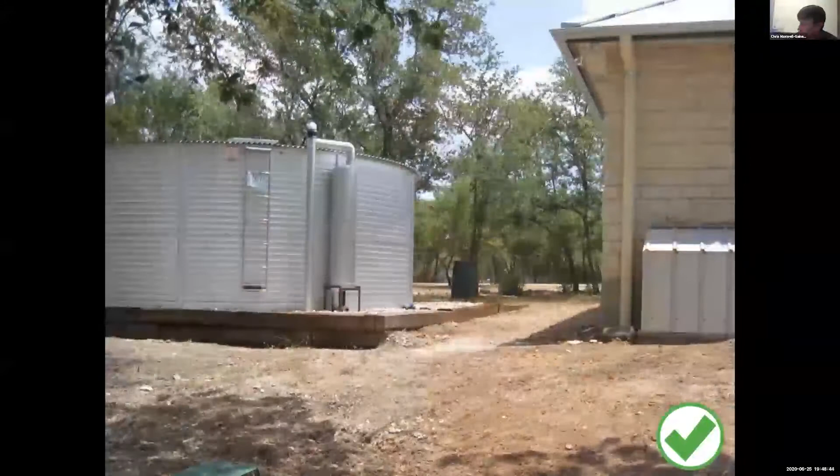Or a wet system. You can see here the downspout, one of the downspouts, and we're collecting from the entire house, and that pipe is underground here, popping up right there to the first flush and then into the tank. To be able to collect the whole house, obviously you could not do a dry system.

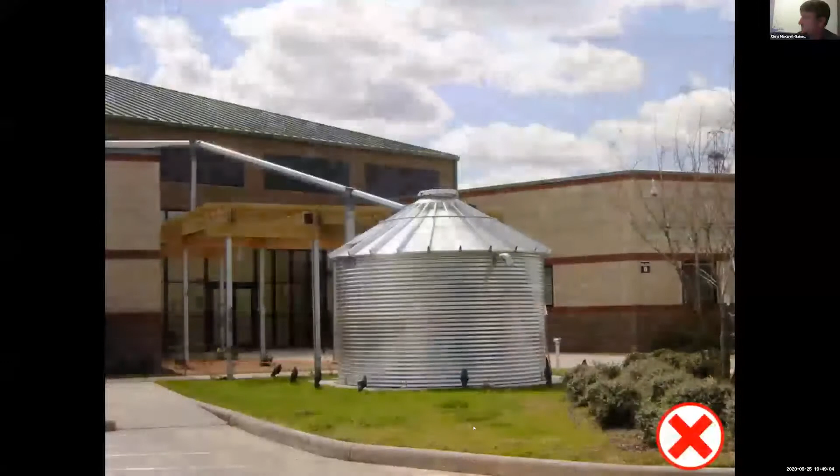Commercial style - I always talk to architects about this. They design these nice looking buildings and all that stuff, and then they say, oh, the owner wants to do rainwater harvesting, so they draw a circle on the plans, and then they go, well, how is the water going to get in? They leave it up to whatever contractor to figure that out, and then this is what you get - this pipe flying through the air, really distracting from the building and what's going on.

Again, back to our example here, where it could have been done in a wet system and been much cleaner and just aesthetically better for the building.

Going back to connections, there's just so many ways to do connections - there's buckets, there's duct tape, there's little wooden tops that people make and drill a hole in it. Nothing bad per se, but I would say something bad about this, because it being open, now it's just a mosquito breeding ground. You definitely want very tight, very secure inlets and overflows from your rainwater volume or storage tanks in order to eliminate the possibility of a mosquito breeding ground. So there is some bad stuff, particularly with this one here.

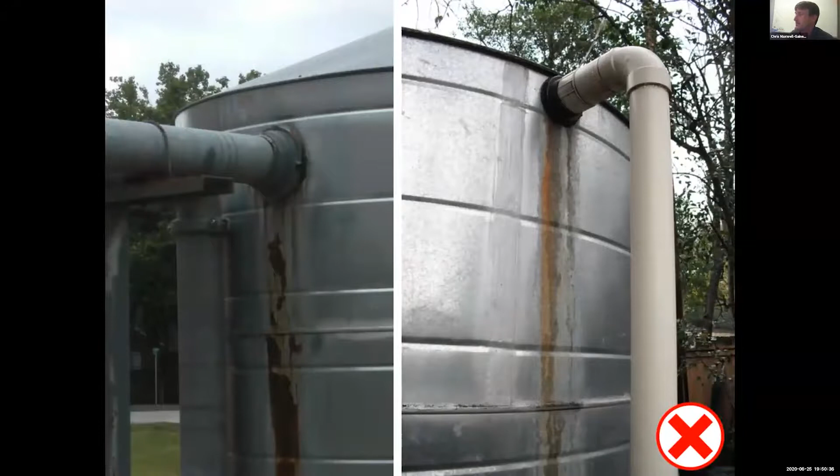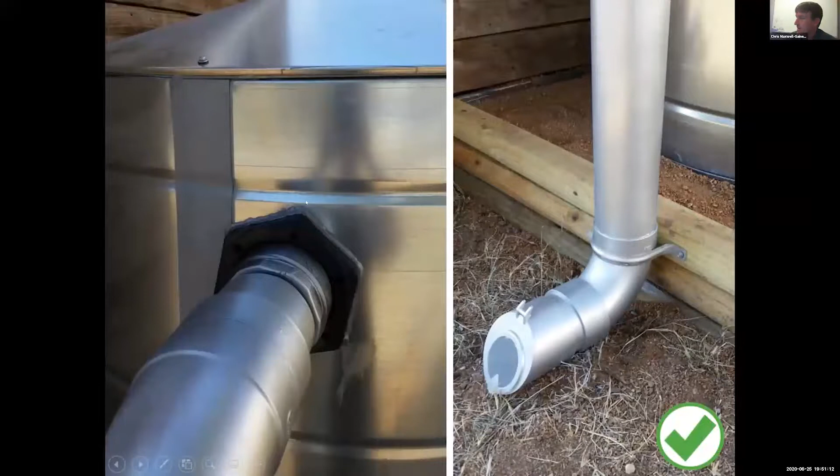On things like metal tanks, using the right types of bulkheads, and also positioning - even though this one is a bulkhead that they're using, just the way they position it, they try to get it as high as possible. These type of tanks have these little strength ribs in here, and because of that, they weren't able to get a good seal. So when rain is coming in, it's dripping down, and even though this is galvanized metal, it will rust - that's what you're seeing here happening on the outside of tanks. So coming in with an appropriate bulkhead, in a spot where you can get a good seal, not trying to jam it in where this rib will cause a problem.

For the overflow, we have things like these mosquito stoppers. They're like a flap valve, so when water is overflowing it can shoot out. There's a little screen on it, so if it's a very small flow of water, it can still come out, but basically it closes so mosquitoes can't fly up and get into the tank.

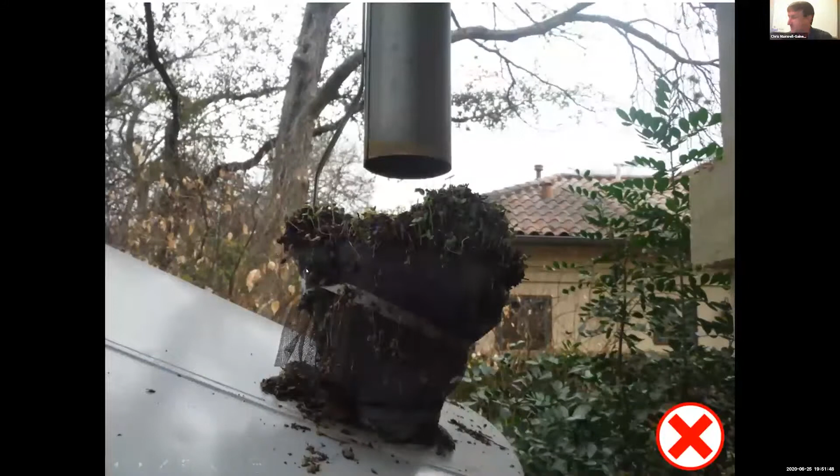Do-it-yourself inlet filtration—again, nothing wrong with it as long as you keep up with the maintenance and clean the debris off, rather than this, which almost looks like bean sprouts, like someone's doing an experiment cultivating food up here. Nothing wrong with a homemade inlet filter, just make sure to maintain it. But there are products out there meant for that, and I showed you one earlier.

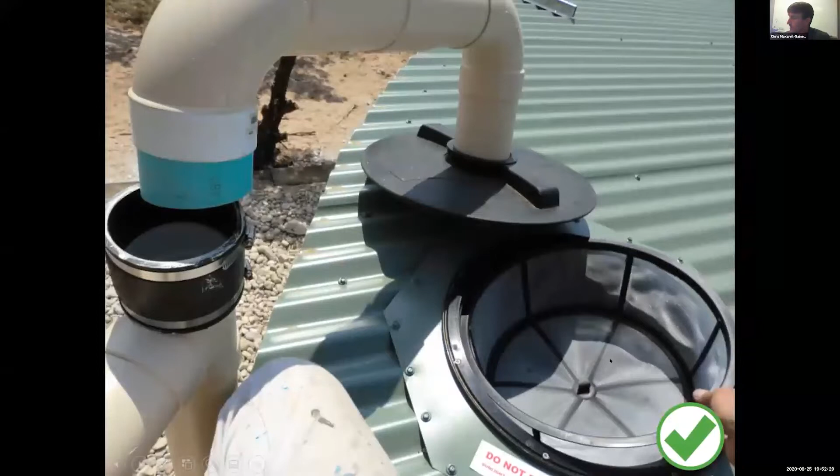This is a different style of rain head. It has that slanted screen that can flush off debris coming from the gutter, or you can employ a screen inside the tank. So that's another option if you can't use a rain head in your system setup—possibly using an inlet screen.

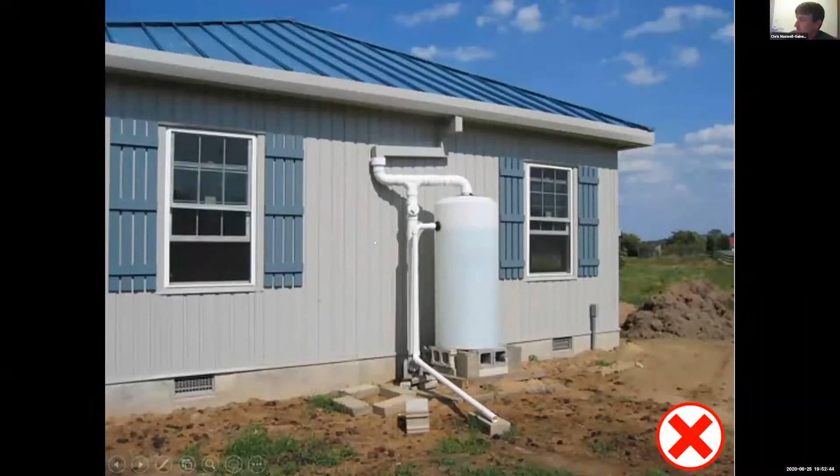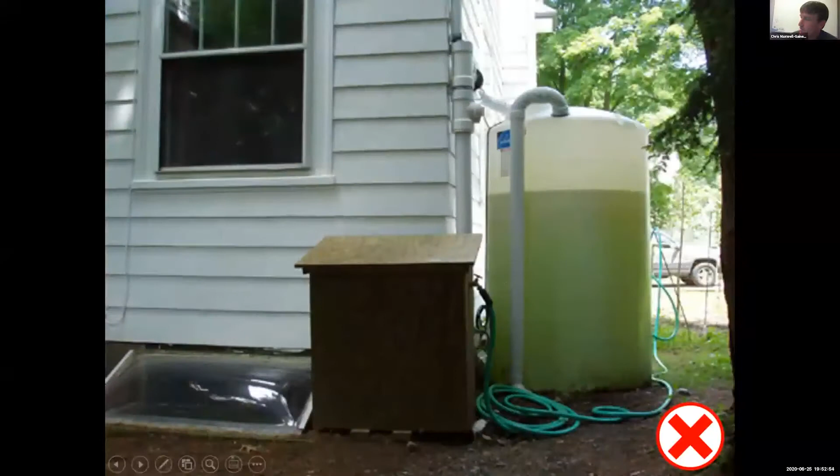Do not use a translucent tank. These type of tanks are meant for chemicals and chemicals only, because chemicals will not grow algae. If you want pea soup as your rainwater, then yes, be my guest, use a translucent tank—they look great when they first go in, but within a matter of time, that's what you're looking at.

So you want to use an opaque tank so no sunlight gets in, because sunlight is what causes algae to grow. If you keep the sunlight out, you'll have an algae-free tank. The algae-producing organisms may still be in the water coming off your roof and through the gutter into the tank, but if there's no sunlight, they will not grow—so it keeps your outlet hose bibs free and clear, not gunked up with algae.

So here's just your typical opaque tank. Nowadays, current manufacturers offer 5 different colors. There used to be a lot more colors available, but some consolidation is happening in manufacturing. These poly tanks are meant so no sunlight can get through them.

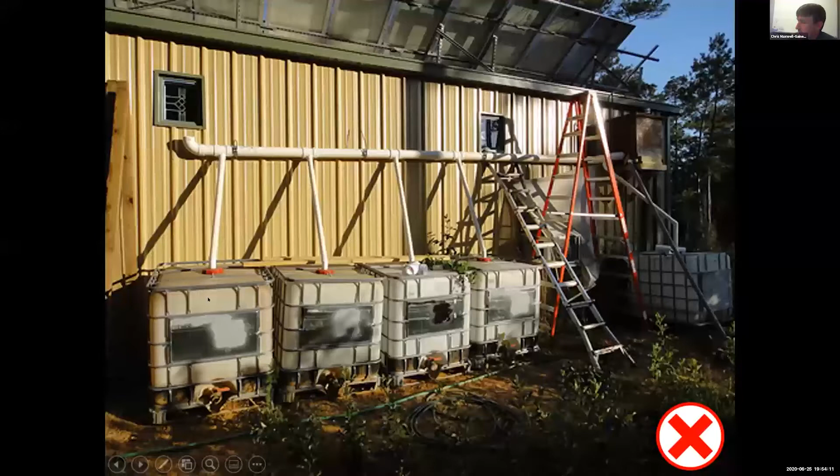And then you see these type of tanks out there a lot, right? These are the syrup tanks—things shipped around carrying a very concentrated syrup, which they then dilute. A lot of times you can find these for really cheap or even free. Well, the issue is they're translucent again, and that causes problems.

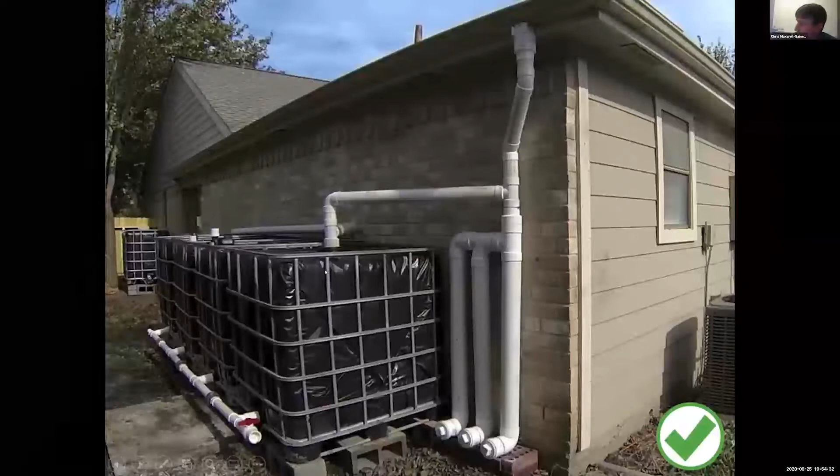If you do have an opportunity to get those tanks, you can see what this person did: they wrapped it with poly, kind of like a Christmas present inside there, and then put the tank back inside the cage. That's going to prevent the algae from growing—a really great augmentation to the system to include that poly wrap around the tank.

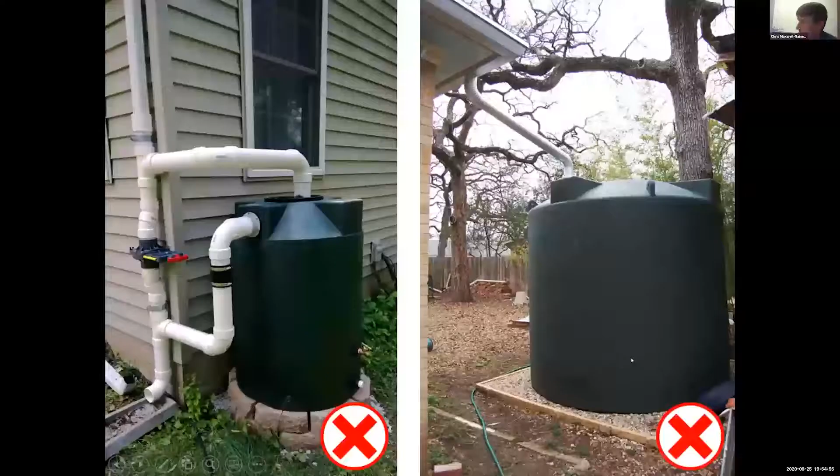Some of this I don't like—this oak tree is right here, and the tank is right up next to it. This is a 2,500 gallon tank, so that's about 20,000 pounds when full, a lot of potential pressure on this root system. I feel like it could affect that tree in the future and cause some damage to it. So really pay attention to where you're siting your tanks.